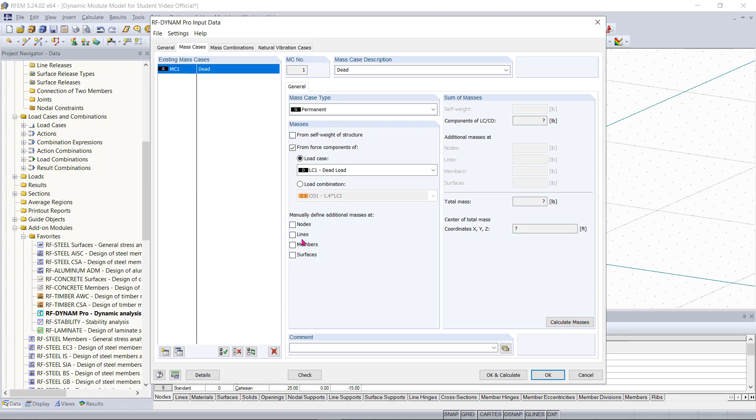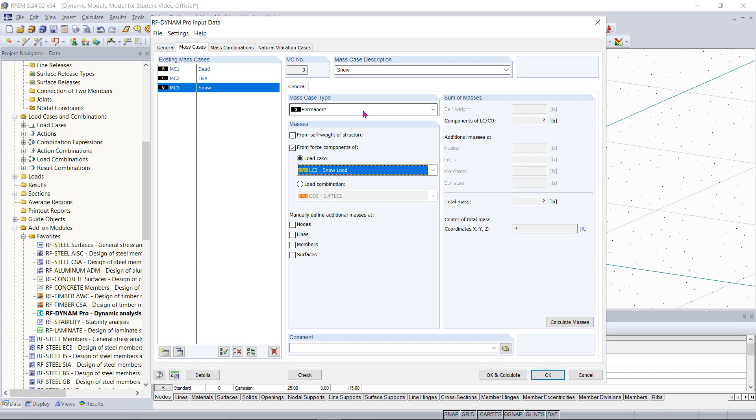Now there are options down here to manually define additional masses, but for now I'm going to leave these empty. And now we can take this mass case and make a copy of it, and then we can name it live, and we can import our live load from RFEM into the module. And then all we need to do is make a third copy and call this one snow. This will be our snow mass case. And then we can go down here and make sure the snow load is being imported in from RFEM for this mass case. So now that we have these mass cases imported, we can proceed by combining these cases into mass combinations in the mass combinations tab.

So now referring to the ASCE 7-16, more specifically section 12.7.2, the standard tells us that we need to include 100% of our dead load. And if I go to the code, you can see that right here. And it also states that when it comes to the live load of a structure, if it's used for storage, then we need to include 25% of the live load. And for this particular example, I will assume the structure is used for storage. So I will use 25% of the live load.

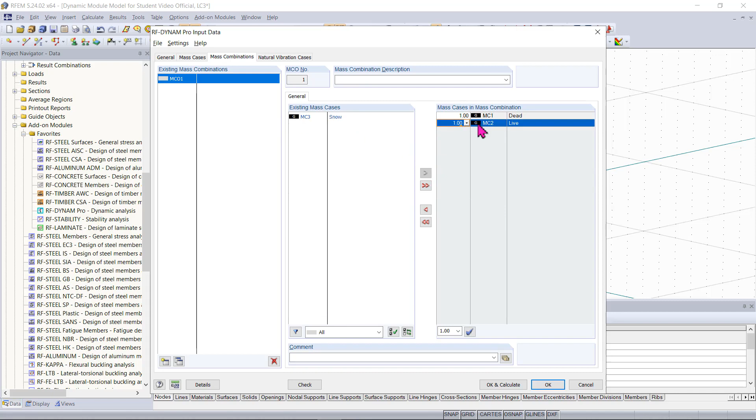So if I hop back to RFEM, I will move the dead load over and include 100% of the dead load by keeping this factor 1.0. And then I can move my live load over, and all I need to do is double click on this factor and change it to 0.25 and hit enter. And now we have a factor of 0.25, so we're only including 25% of our live load.

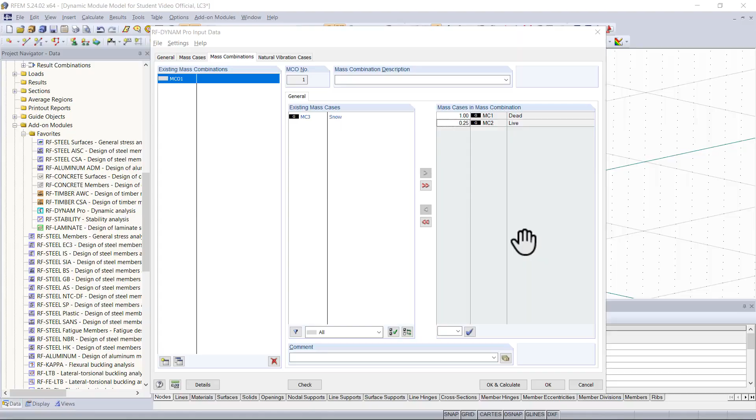Now the code also mentions that for our snow load, if it has a magnitude of over 30 psf, then we need to include at least 20% of our snow load. In this example, if I go back to RFEM and I hit OK and go to my snow load, you can see that I have 32 psf applied to the structure, and so now we can move our snow load over and apply a factor of 0.2 to the snow load.

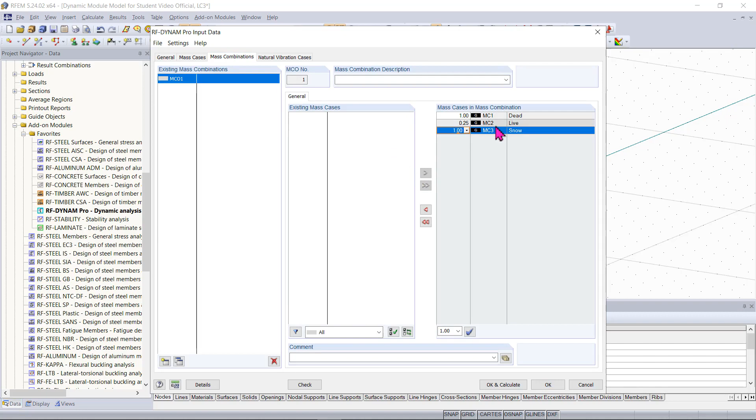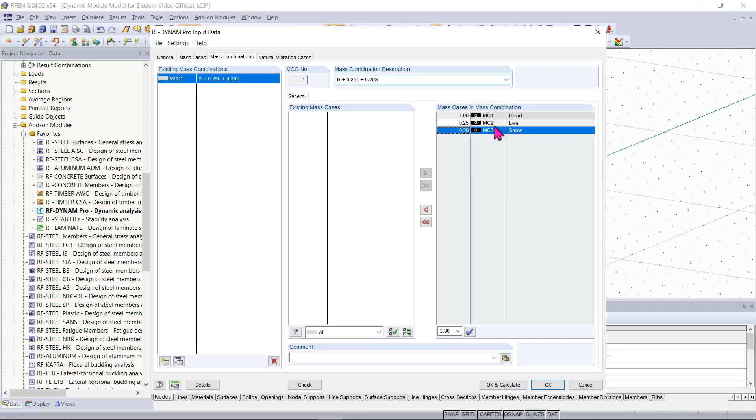So now we can give this mass combination a name, and we can call it dead plus 0.25 live plus 0.2 snow. And now finally we can take a look at our natural vibrations case tab. So the first parameter we should take a look at is the number of lowest eigenvalues to calculate. Right now this parameter by default is set to 4, but for today this is fine. We're just going to leave this as default for this example.

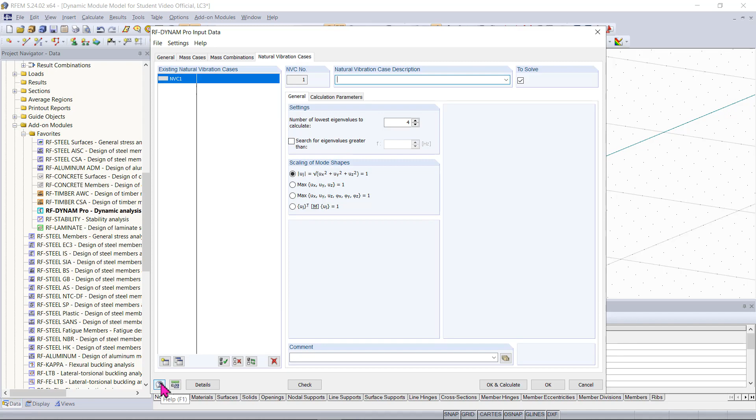And then the scaling of mode shapes is the next parameter we want to take a look at, and you can see that there's a couple of options here. Right now the default is to just take the square root sum of the squares, and with these couple of options I encourage you to take a look at our help manual for the dynamic module, where you can see a little bit more theory on how the calculation is done for the scaling of the mode shapes. You can take a look at this manual by going down here and clicking on the help button. Within this manual we can scroll up to page 19, and here's where you'll find more information on the other options for the scaling of the mode shapes, and this will help determine if the other options are better suited for your design project.

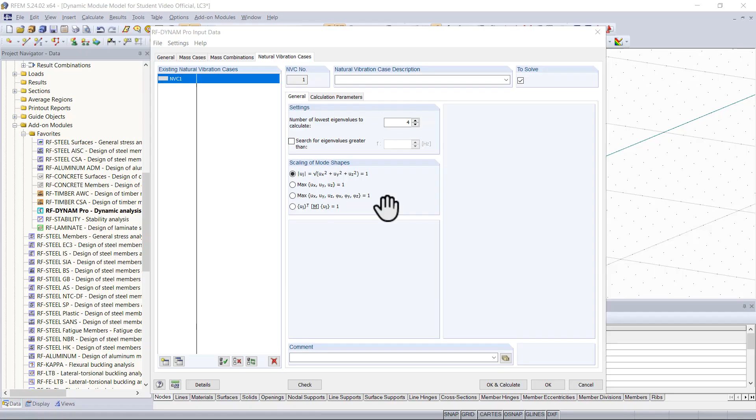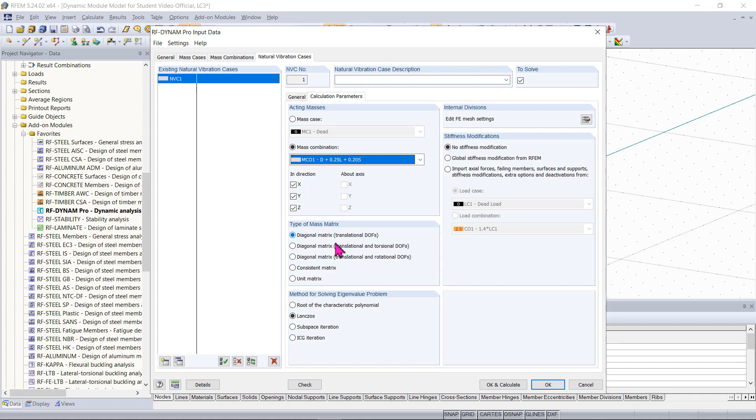So back to RFEM, the next section of data to focus on is the calculation parameters. And here we want to choose the mass combination that we just created. When it comes to the acting masses, these are controlled by the acting mass matrix as well. So you should be able to see here by default the diagonal matrix with only the translational degrees of freedom is set. So our masses are only going to act in the global x, y, and z coordinates, which you can see back here in RFEM. And you can see there's other options to include both translational and rotational or torsional degrees of freedom. So with these options you'd be including masses about those axes. So there really are a couple of different options you can choose from here, and for now we will just go with the first default option.

There are also multiple options for choosing the method for how the eigenvalues will be solved. We have different calculation types you can see here, and for this example video we will be utilizing the Lanczos solver, which is an iterative method used to determine the lowest eigenvalue and corresponding mode shape of larger models. So basically this solver allows the user to determine a quick convergence, and in contrast the root of the characteristic polynomial method will calculate all of the eigenvalues and corresponding mode shapes, so this method will take a lot longer.

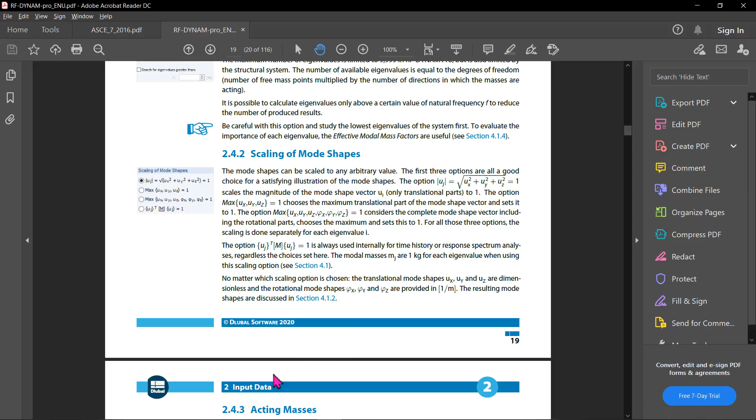And when it comes to deciding which set of mode shapes and solver to use, we can again take a look at the help manual for a better understanding of the theory behind these options, and this will help you decide which options are best suited for your project. So we can take a quick look at these on page 19, and I can zoom in and we can see the different types of eigenvalue solvers here and the theory behind each one.

So back to RFEM. With regards to the stiffness modifications, we're going to leave this as no stiffness modification for now, but keep this in mind as I'm going to discuss this in more detail later on in the series. And so now we are done basically with entering all of our necessary input data needed to run a calculation for our natural vibrations case. In the next video I will be running the calculation and explain how to interpret the results.